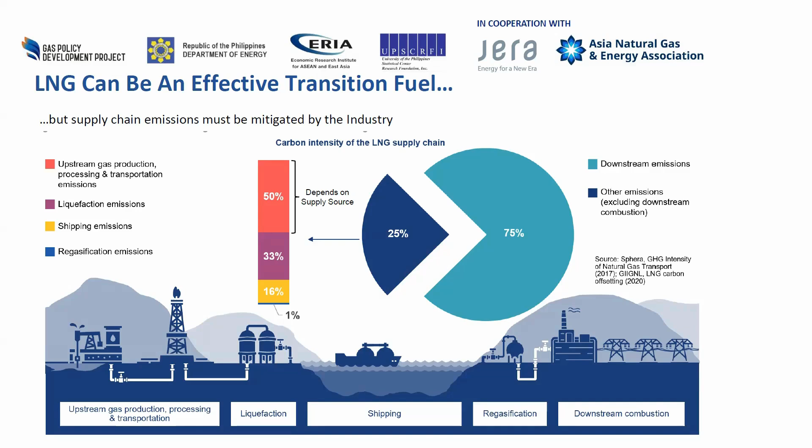But the emissions of methane, you can't smell them, you can't see them. There are a range of initiatives to try and better understand how big methane emissions are in that part of the chain, this part up here, the upstream. And that ranges from satellite data to drones and a whole range of other things. That's one of the areas of uncertainty and real academic argument around how big those upstream emissions are.

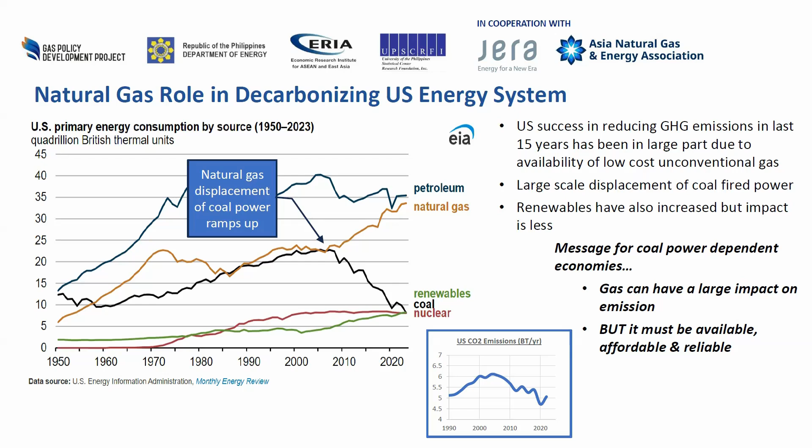There are a lot of things that need to be done to decarbonize. And there are a whole range of different technologies that need to be developed, things like ammonia, carbon capture and storage, which I'll talk about in a second. But what LNG and natural gas do is they provide firm capacity available at short notice to complement renewables. So they're really a very good partner for renewables.

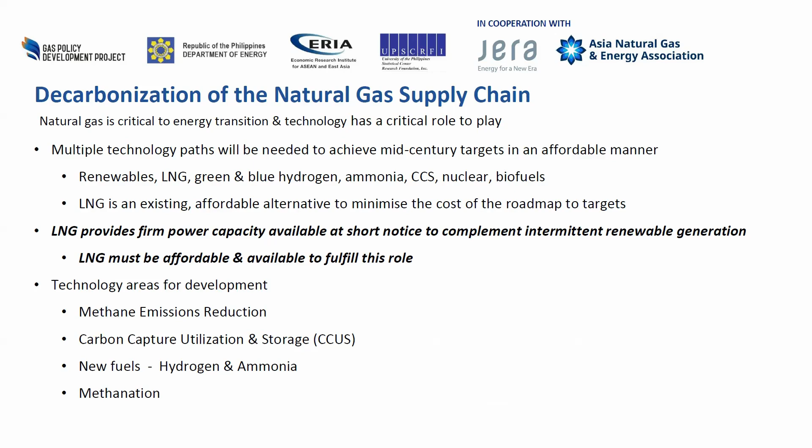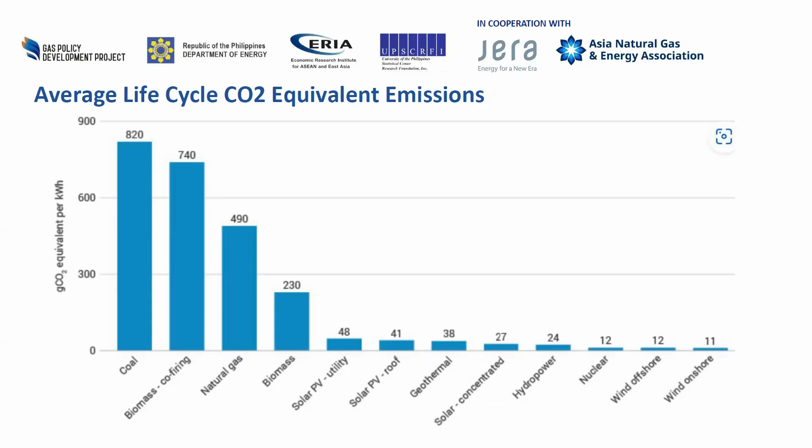And generally, natural gas will be about half, roughly, depending on what those upstream emissions that I mentioned earlier were. But generally, it's around about half. So that's what makes it possible to reduce your emissions. You replace coal with natural gas.

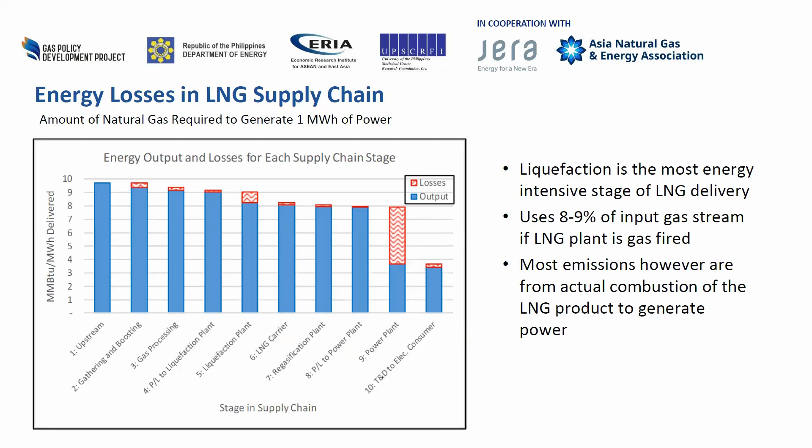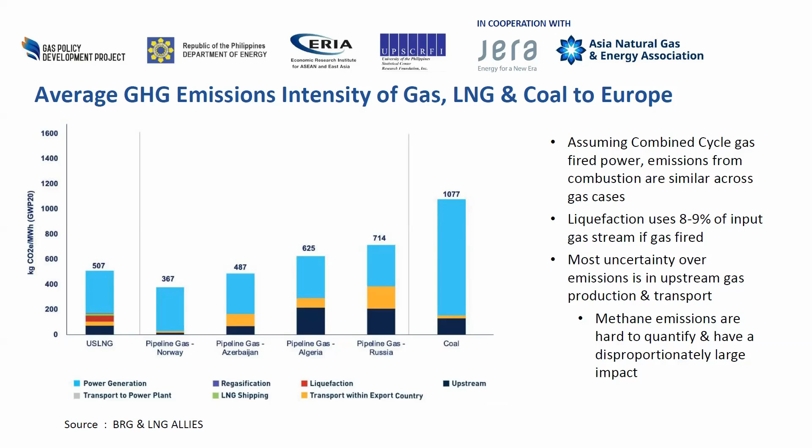And this is the emission intensity of gas, LNG, and coal into Europe. So this is US LNG going into Europe. On the far right is coal in Europe. Again, it's around about twice what you get from burning gas.

I'm focused a lot on methane here because I think it's an area that's becoming very much more of a focus. You can reduce methane emissions in a number of ways. Things like reducing flaring, but it's kind of unglamorous work on things like making sure seals work. But it's straightforward technology, and it's things that can be done now.

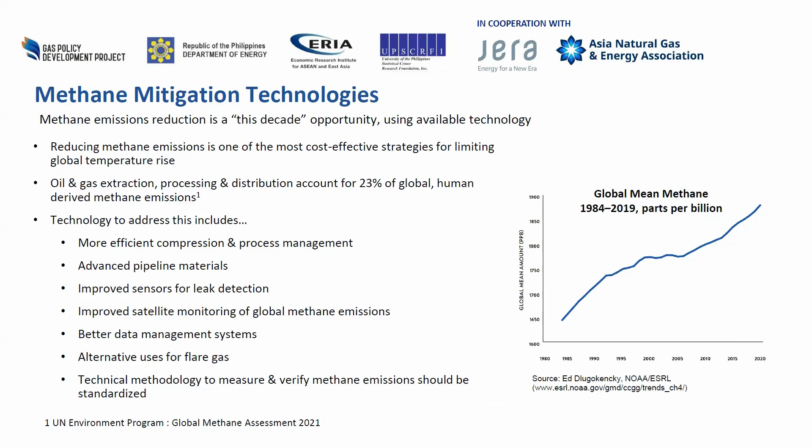I'll just mention carbon capture and storage, which is quite interesting. I'm sure you've heard of this. This is where you have carbon dioxide, you re-inject it into the ground, into some sort of geologic formation, and store it there. And we did this on a very large LNG project in Australia called Gorgon that I was lucky enough to work on.

It is definitely going to be part of the energy transition story. It's not without its challenges, but you basically take carbon dioxide, and it's better if you've got a stream that's like 100% carbon dioxide, a very high percentage. And you send it out by pipeline and re-inject it, usually into something like a depleted oil field, or you can just put it into a saltwater aquifer, into sandstone, basically porous rock. And when you compress it, if you put it into the right sort of formation, it will just stay there.

And one of the opportunities that's emerging is to turn this into a business. You could potentially transport CO2 in tankers from countries like Japan or Korea, where there aren't necessarily the geological opportunities to store CO2 like this, to countries where they are. A number of those countries will be in this region, in Indonesia, Malaysia, and so on, and be paid for storing that carbon dioxide.

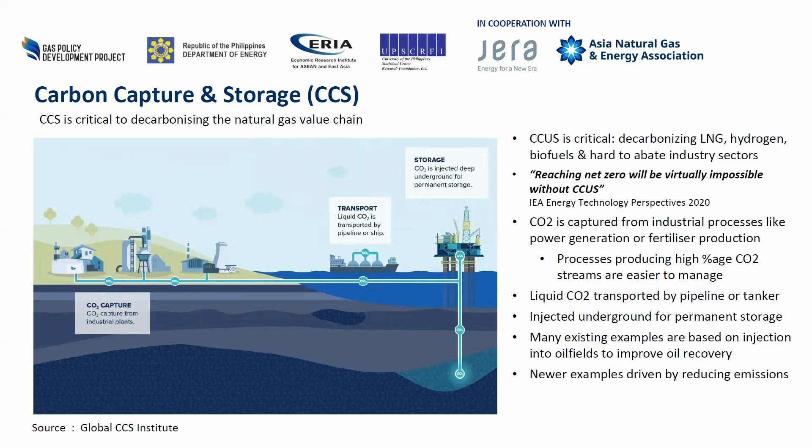In terms of where it is being done at the moment, there are a lot of projects in the US. A lot of these are around improving recovery of oil. There are a number in China, the very large one in Australia that we worked on, and some in the Middle East. But there is an opportunity, I think, for Southeast Asia to develop this business of sequestration of CO2 for other people.